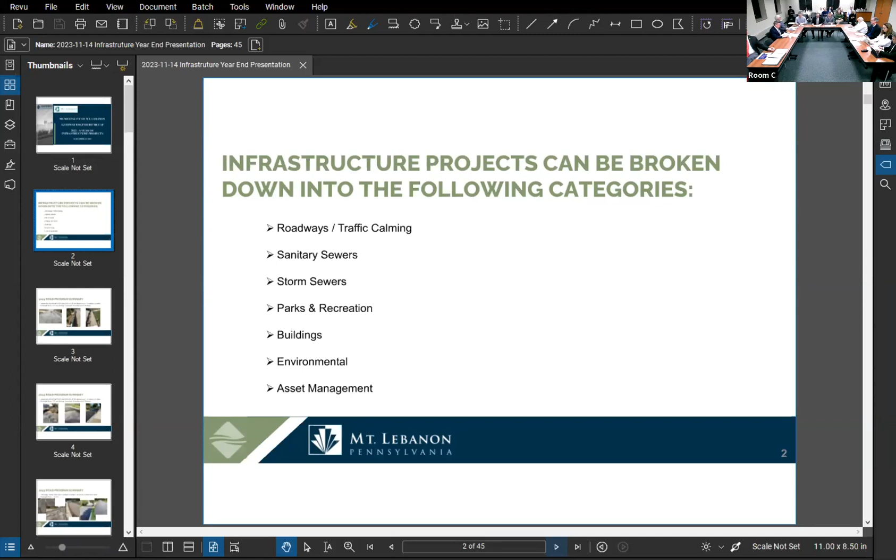So we've just broken it down into some different categories. Matt's going to take us through roads. Josh will talk about sanitary and storm sewers. I'm going to pitch in on some of the parks and building projects, and then we have a couple of environmental projects we'd like to highlight and then talk about asset management. So with that, Matt, you want to start us off on the roads?

All right, thank you, Dan, and good evening, Commission. Obviously, one of the bigger expenditures each year is the roads, both the reconstruction and the mill and overlay program. So we thought it'd be good to highlight some of the work done this past year. This year's road program encompassed 10 roadways. We did drainage work on 9 of them. It was just over $2 million for those roadways. If you equate that to a per-mile cost, since we did just over three-quarters of a mile, the per-mile cost is about 2.6 million per mile.

I'll contrast that with some of the mill and overlay work in just a minute. As you can see from the photos on the slide, the bottom left is a road that's going to be considered for reconstruction. The middle shows the different stages, because oftentimes in your package you see phase 1, phase 2, phase 3 of construction on the schedule as work takes place. The first picture is a road being considered, the middle picture shows drainage improvements being made, and that's a picture of roof drains being captured to eliminate icing issues that might develop.

The third photo on the bottom right shows new curbs being installed. On the next slide, the left image is the excavation where we're digging down to the subgrade soil. The middle picture shows the geotextile and stone going in, and lastly on the bottom right is the final pavement.

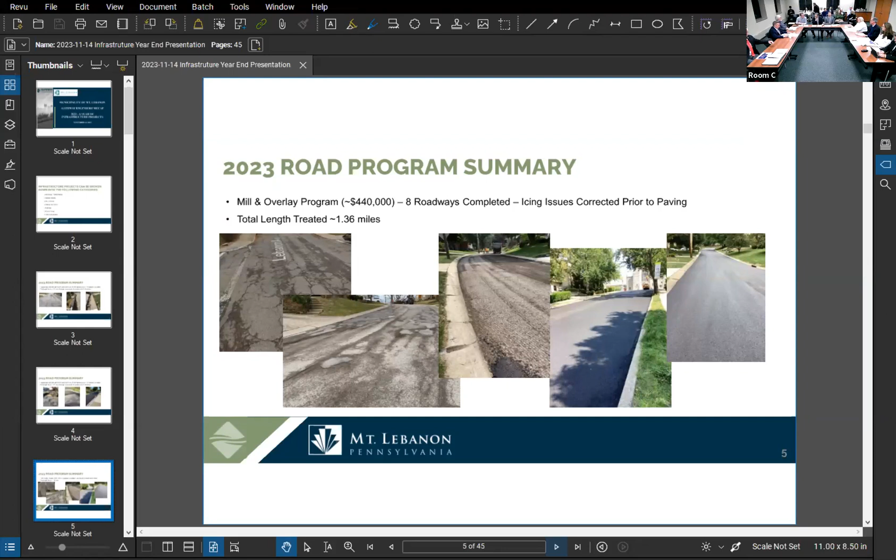So to that point, we know we're good for at least 50 years. Our thought is that as long as we keep milling and overlaying and doing that maintenance, we should be good on those roadways for 50 years, or more.

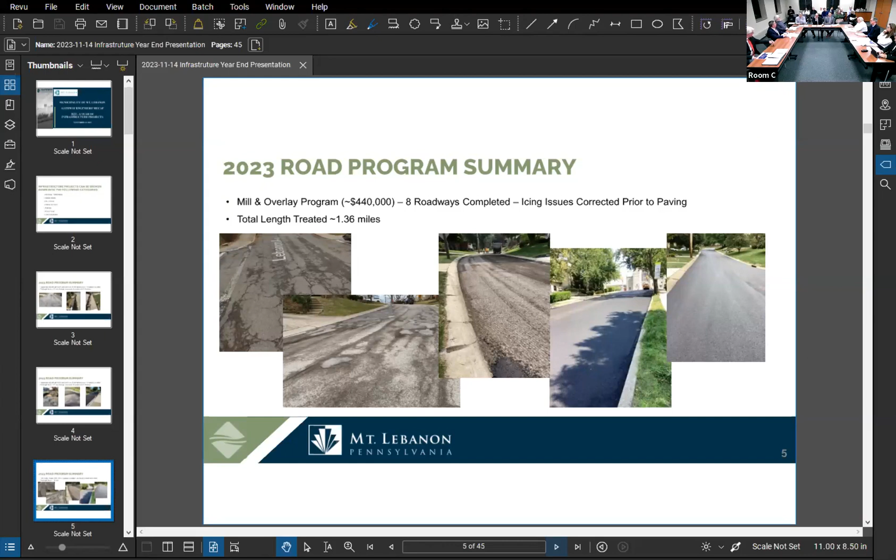Slight tangent on that topic: as the utility comes in and tears it up, does that change the long-term viability? Would that change your assessment? No, because that leads into the next slide here. So on the utility work, bear with me one second, I'll answer your question.

We did have a bit of a benefit in the past year, and over the last 6 years or so, the utility companies have been doing a lot of work, as we're all aware. Last year it was about 2.7 miles of road work. That didn't cost us anything other than the inconvenience of them working in and around town with the roads being torn up, but they did mill and pave the roads afterwards.

Now, what we always do, Public Works and I, if a road is a full depth road, they're required to put that full section back in when they finish their work. If it's a road that is asphalt over concrete or something like that, they just do the wearing surface material afterwards. They don't reconstruct it because they don't need to go into the base, especially if it's a road we're considering paving in the future.

In a minute, we'll talk about the planning for how we try to work with the utility companies for the roads they're going to do. We mirror that with our programs moving forward, because we don't want a situation where we pave or reconstruct a road and they come in the next year and dig it up. Obviously, we can't control their schedules.

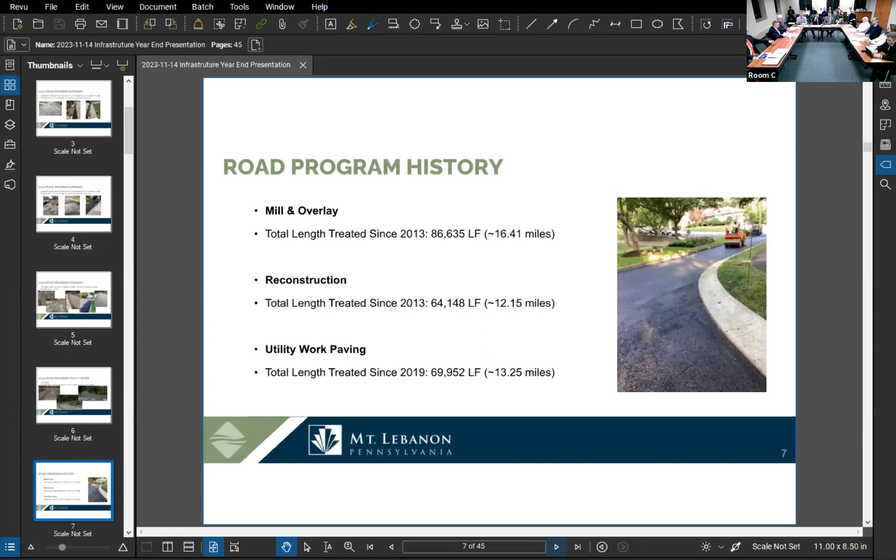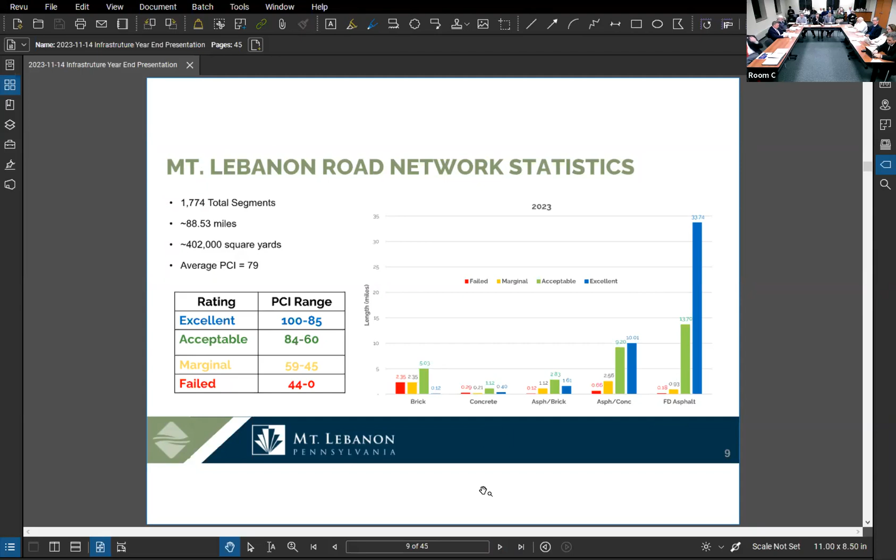The next couple slides are giving some of the statistics. You'll see the different roadway types and the breakdown between excellent, acceptable, marginal, and failed in each of those roadway types, from brick all the way to full depth asphalt. The next slide shows the miles of road in each category. For instance, the full depth is 48.56 miles. That's the number inside of the table there. And the top number, the 84.55, would be the average PCI of those full depth streets. It ranges from 84 down to 58, which is the brick streets, and that's the 9.85 miles of brick street that we've discussed.

I think it's really interesting to see that over half of the street system is full depth reconstructed. That was started 43 years ago. Think about that. In that time, we've gotten more than half of the roads rebuilt in the community. I think that's a testament to the commission always funding the program, because we're going to flip the switch pretty soon where we do more mill and overlay, as Matt was talking about, and we won't be reconstructing things at a certain point. So that's the idea of keeping your roads in good shape: rebuild the ones that are bad. A lot of the older roads didn't have any substantial base, no drainage, and all the things we've been doing in the current plan.

What does our ordinance say we want our average PCI to go no lower than? The current ordinance, I believe, is 60. 60? Okay, so right now our brick streets are averaging below 60, but the total overall PCI is not. On the whole, the total system is about 79. Yeah, correct. 79, that makes sense. But that is noteworthy to me that on average, our brick streets fail what our ordinance says when we pull them out. So I would say that's where we need to put the most attention, the most funding over the next 5 to 10 years. That's what's failing.

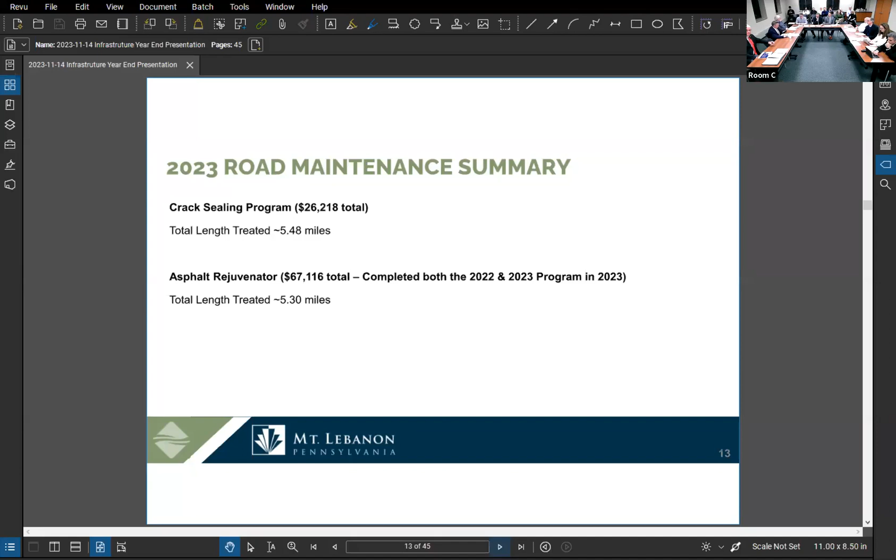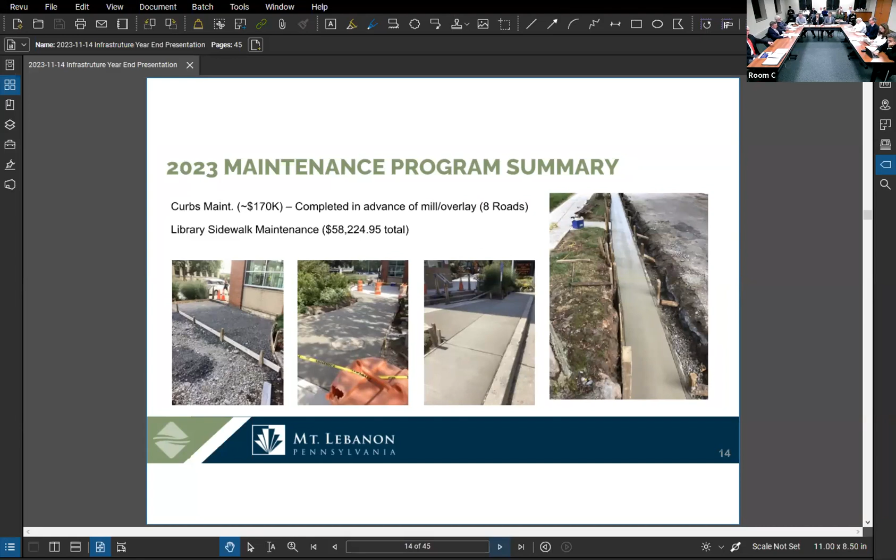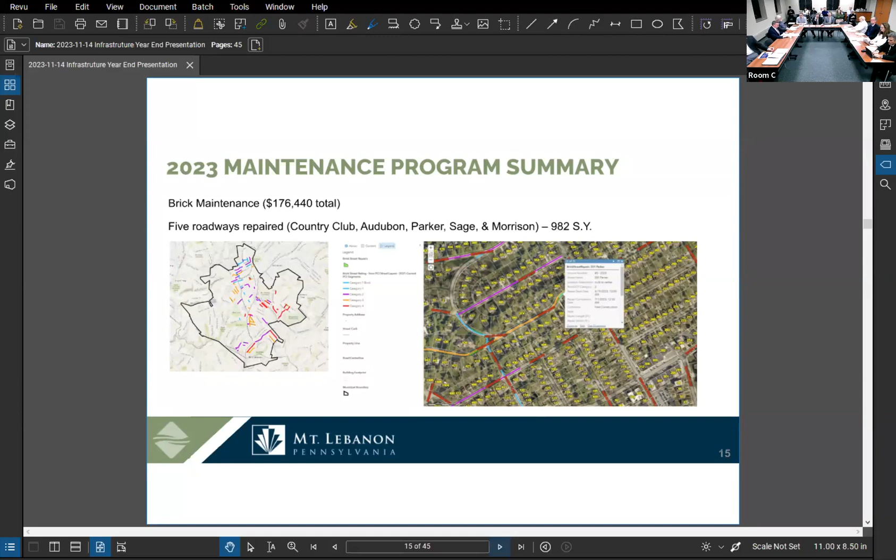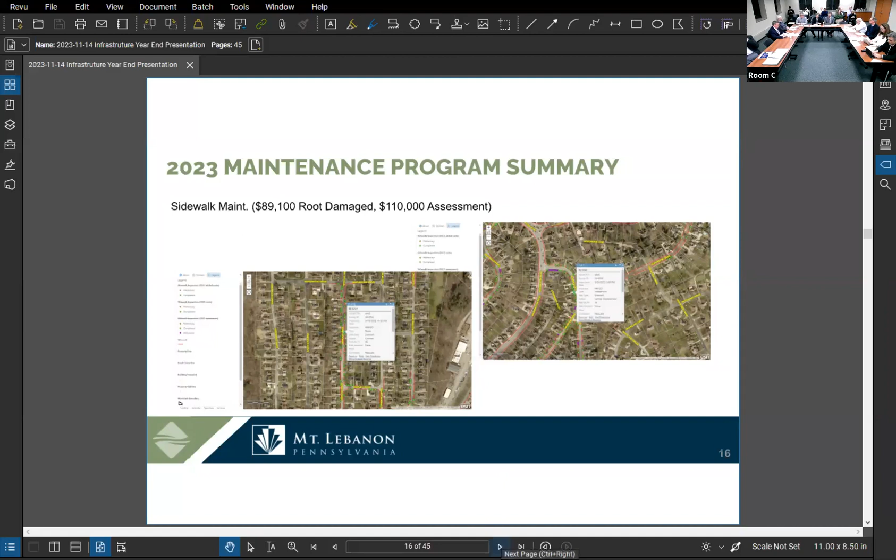Similarly, the sidewalk maintenance contracts, there's the root damage and the assessment. These, as was the brick street work, are run by Public Works. Other than us putting the contracts out, they keep track of it in GIS, which once again just shows how powerful a tool the GIS system is to keep track of all of these different contracts and what's done and when it was done and all those things.

Next, moving on to the component of traffic improvements and road improvements, there were a couple projects that were completed this year. Bower Hill Road and Segar improvements: we got a right turn lane, some ADA improvements, some signal modifications. This was partially funded by an ARLE grant, which is the PennDOT, or state of Pennsylvania, funding for automated red light money collected through tickets. And we were able to get this project done.

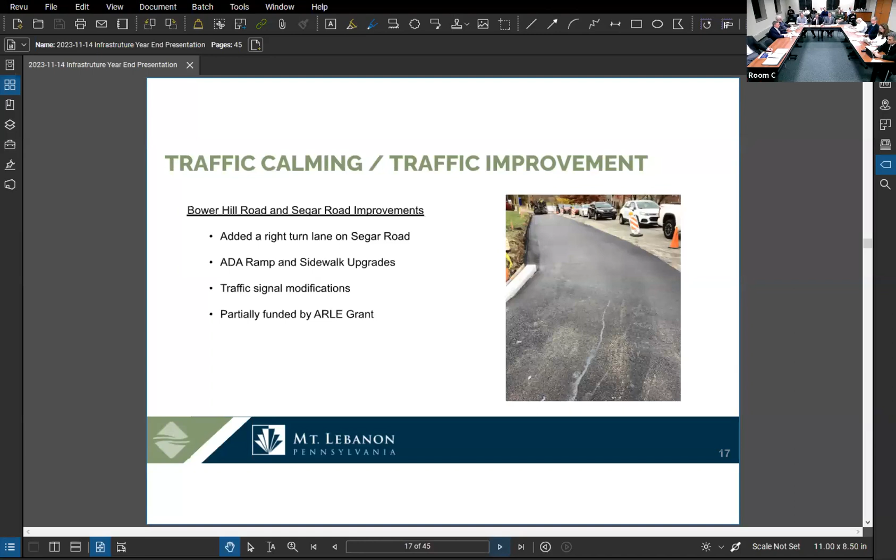It is complete. The second project that went through a long process and was ultimately built was the Arden Road traffic calming plan. There were geometric modifications made, some speed humps, pedestrian islands, a traffic circle. That project was originally bid. It really was authorized a little later in the year. When we put it out for bid, it just had too many different things going on to get people to bid it at that time of year. We were able to get the street reconstruction contractor to do a majority of the items that were already in his bid, and that project is complete.

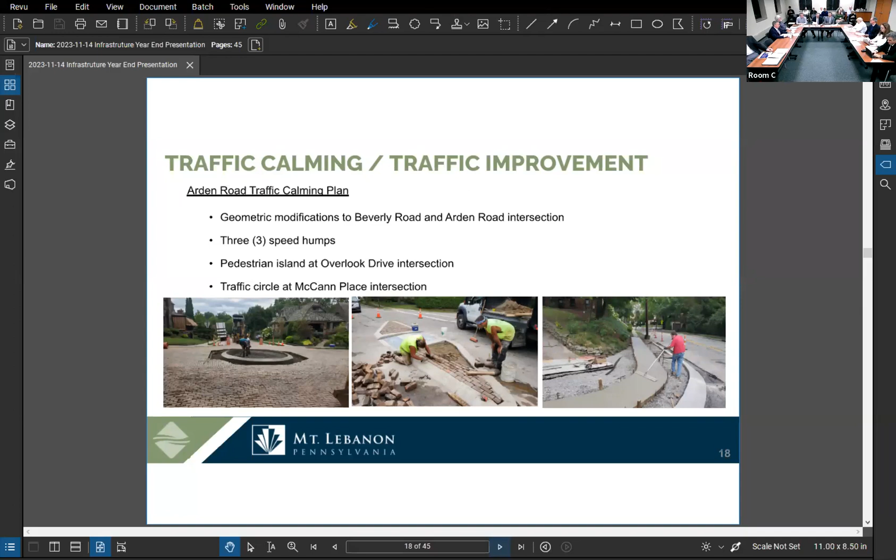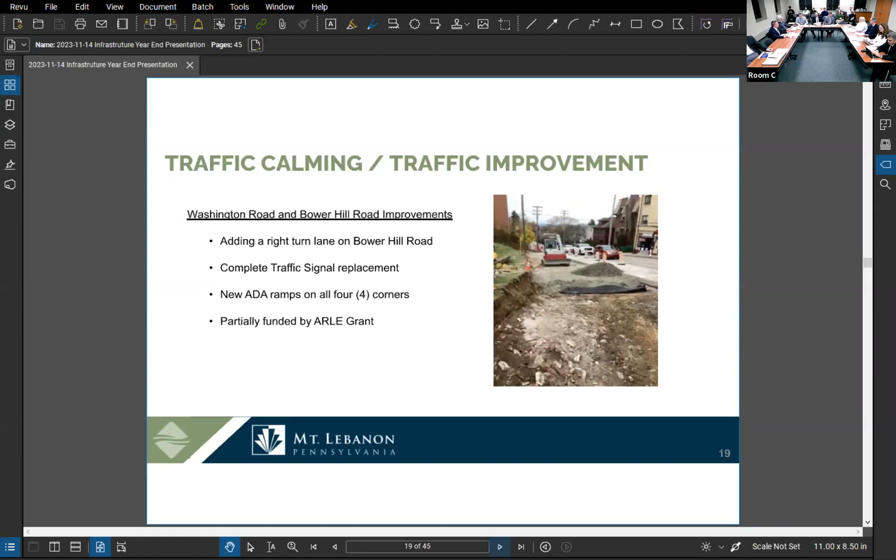The next project is the Washington Road and Bower Hill improvements. I call this another COVID project where it was started right at the point where COVID was, and due to some delays on materials and signals and poles and all those things, it's still out there. We're almost complete. This is an addition of a right turn lane on Bower Hill Road, complete traffic signal replacement, ADA ramps on all four corners, and again, this was partially funded by ARLE grant. So next, I'm going to turn it over to Josh for discussion on sewers.

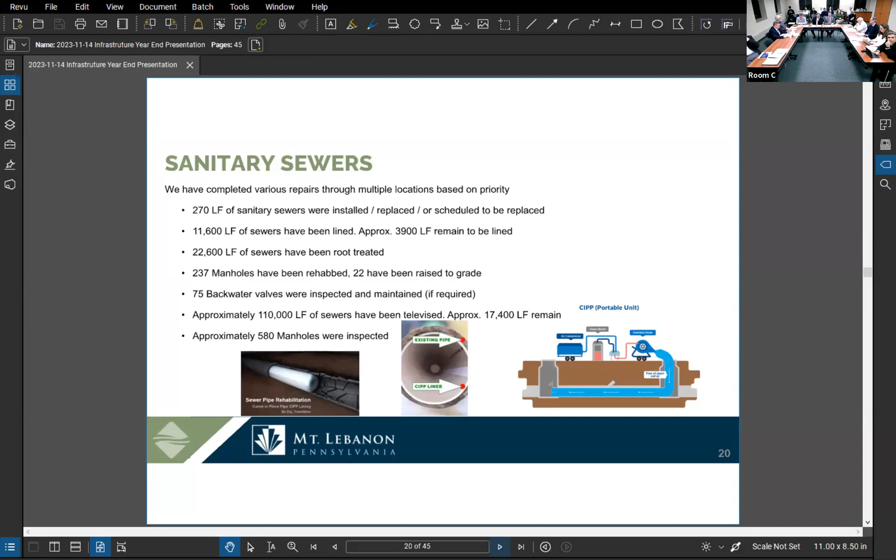So on the sanitary sewer side of things, I listed out on this slide various statistics of work that has been completed this year. But a high level overview of the program: we take a proactive approach, and each year we televise approximately 10% of the system. We couple that televising with the upcoming road program as well, so that if we do find any repairs we have to take care of, we're able to do that ahead of any type of paving that happens. So as we televise that system, we identify defects, which leads into the next slide.

A couple of these pictures show different examples of the various contracts we use to repair defects that are identified. Those contracts include the point repairs, which are your excavation repairs; lining, where we're essentially establishing a new pipe in an existing pipe without having to dig. It's obviously the least invasive and renews the pipe. Manhole rehab, where you're sealing the inside of a manhole. That's actually the second picture from the left.

Root treatment, which is a chemical treatment we push through the sewers to reduce the amount of root growth in that sewer. And backwater valve maintenance, which is a courtesy the municipality provides to the residents to inspect backwater valves. The purpose they serve is, in the event the flow surcharges in the main line, it prevents the flow from going into the house. Got it. Exactly. Many of these contracts are multi-year contracts. The benefit to that is it reduces bidding costs and helps to establish contractor consistency.

One thing interesting to note is, 10% of the system is 15 miles. So every year we have to digest 15 miles of TV tapes, look at those tapes, and assure that where there's defects they get addressed. There's a lot of coordination between getting repairs done, documenting them, reporting back to the agencies, because ultimately the health department monitors the maintenance program that's done on our sewer system each year.

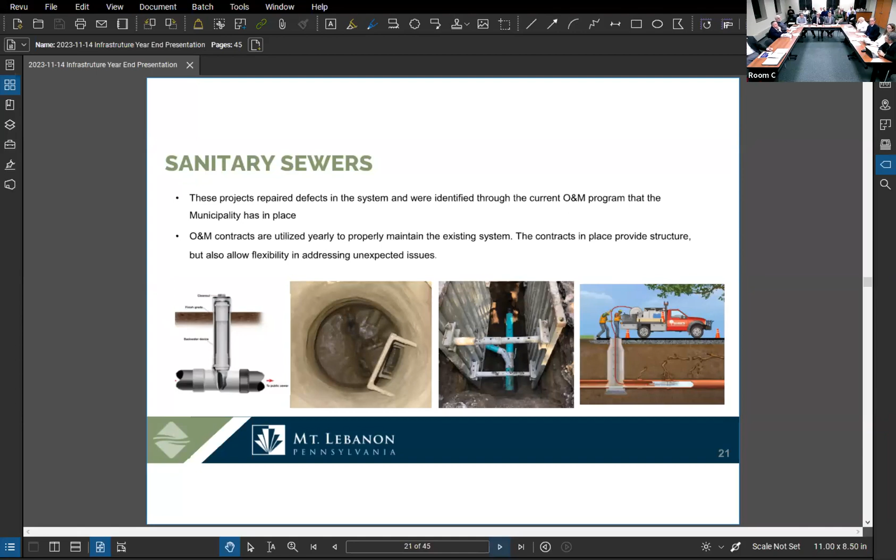And have we learned anything from the flow meters that were installed? I know one of the questions we got from residents when we started discussing, even before the results of the consent order came in, we were talking about I&I and trying to measure that. Have we gotten any usable data from the flow meters we've installed?

Sure. So what we did, there's multiple types of meters. The commission actually allowed us to use something to do nighttime flow isolation, where instead of going out and physically opening manholes and taking weir measurements, we installed trackers that actually collected data that we used. That's used to actually pinpoint that 80% of your problem is in 20% of your system. So it has allowed us to sort of hone in on those particular areas to do projects.

And that's what we have on the bid right now. We're using that data, that's what you authorized us a couple meetings ago to actually go out. We're taking bids in December to do a very large lining project that is a result of that data we've received. So the actual test will be the post-construction. The data is used to zero you in, you do the project, and then the consent order requires you to do post-construction flow monitoring to determine the results and how effective it was.

Do we have a sense of the split between municipal or public and private, in terms of that 80% of the problem being in 20% of the line? Is that just considering the public lines, or is part of that 80% private lines as well? Yeah, it's considering it sort of zeroes you in first on your main lines, but once you're done, then you'll have accurate information to know on the next step. If all your lines are done, then you zero in on your lateral type of issues.

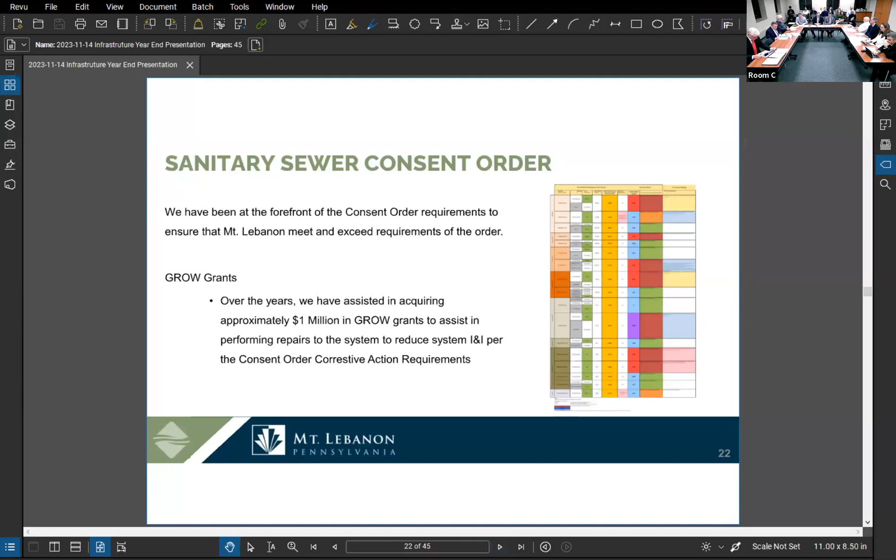We'll continue to work with other municipalities. One thing to note about Mount Lebanon is we have 17 separate POCs, second only to the city of Pittsburgh. That means we have 17 places where we connect into other municipalities, or points of connection.

A POC is a connection point. We have to coordinate with 8 other municipalities, which requires coordination going into the future, probably doing joint projects together that make the most sense for both municipalities. We may not be doing work geographically in our community, but we're ultimately helping deal with the problem. So that's all I have on the consent order.

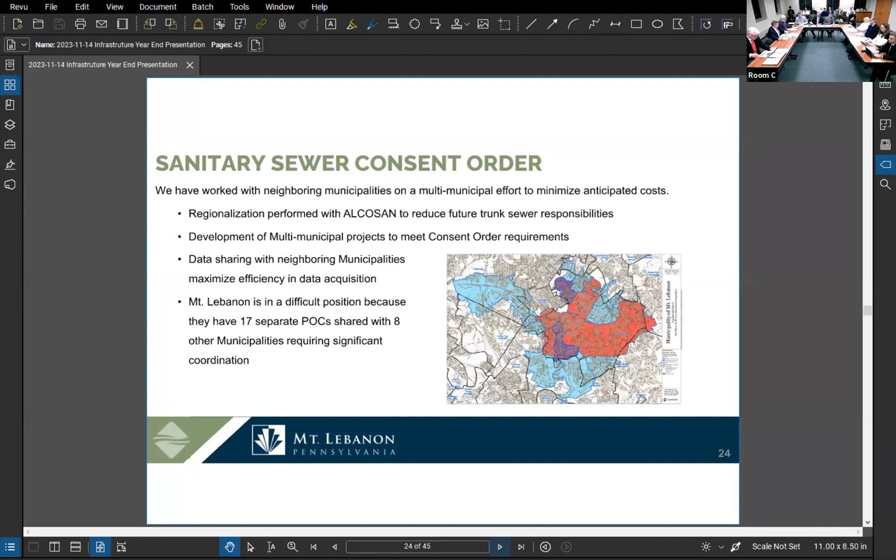Josh is going to talk a little bit about the storm sewer. On the storm sewer side of things, we follow a very similar program to what we do on the sanitary sewers.

The televising we do is typically ahead of the road program, and as a result of events, after storm events, we hone in on a project to resolve issues. The types of projects we're doing each year are repairs to ice spots, whether that be ahead of a road program or just an ice spot that needs to be repaired—that's a continuous maintenance issue.

Resolving defective pipe could mean replacement of that pipe or lining, helping with flooding issues and pole replacements.

The pictures I show demonstrate a few different solutions, whether it's putting new pipe in and replacing the old pipe, cured-in-place lining—similar to the sanitary sewer lining—or slip lining, where you're pushing a new pipe through an existing pipe. That doesn't work for every situation; it's dependent on existing conditions, but it's less invasive than digging.

We continue to be surprised. The storm sewer system is roughly 75 miles of pipe compared to 150 miles of sanitary sewers, but we continue to be surprised each year by things that we find. That's why the commission's commitment to keeping the storm sewer fund in place going forward will continue to be very useful to help people.

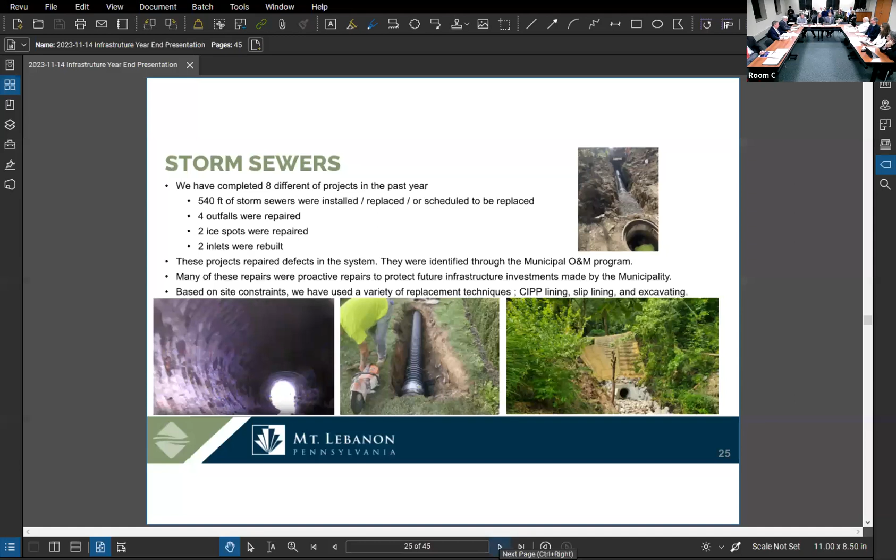Now we're going to move on to projects that we did in the parks. Josh is first up with Robertson Park. We originally went out to bid earlier this year on this project. The budget was around $72,500. We reached out to numerous contractors, approximately 15.

When it came time to open bids, the single bid we received was upwards of almost 3 times the cost if you added in the alternate. So we went back to the drawing board and coordinated with Public Works on the project. Essentially, we ended up building 2 different contracts, one for the topsoil and one for the fencing. Part of the problem was that it wasn't big enough of a project for contractors to chase, but it wasn't small enough for your everyday landscape contractors to take care of. It was kind of in the middle, so we broke it up accordingly and were able to almost act as a GC to coordinate separate scopes of work.

At the end of the day, we were able to bring that in approximately $10,000 under budget, so it was a successful project. But there was probably extra engineering management on top of that—extra administrative costs and inspection costs, just helping coordinate schedules, like doing this first then that—but still not 3 times the cost.

Much cheaper—thanks. I think part of the lessons learned in the post-COVID world with contractors is that people have their specialties and want to stick with them. If you ask them to do other people's work or coordinate other work, they don't want to do it. They're that busy, they have enough work. They don't want the extra hassle of managing other people and carrying their costs, so we're only paying a 10% increase.

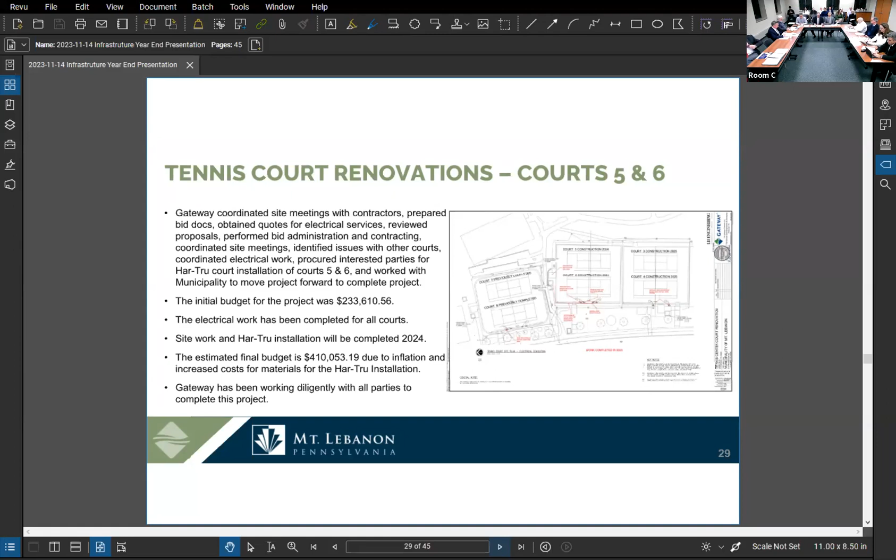Fortunately, on the state contract, the COSTARS, they have bid the Har-Tru work. We were able to get an estimated budget for that. It's not in line with what - the costs have gone up significantly - but again, we have a plan to go forward. We know that we're on the list to get the work done, and that's most important in terms of these type of projects.

Next project is the pickleball court. Fortunately, pickleball was so popular that there were contractors very interested in this. They were willing to coordinate things because they deal with the nets and different things, line striping and everything related to it. So we were able to bid this project, get it in under the budget with minimal delays, and it was completed.

I threw a slide in here on Vibrant Uptown, just to really highlight the significance of the infrastructure related to this project. I know it was not necessarily a fun project for anybody, but I did want to highlight the fact that it still came in under budget. We had great construction drawings, and we had no change orders required due to document issues - they were only things that we added to the project as necessary.

We got through it, and at the end of the day, you look at the numbers in terms of the next slide with the amount of work that was done. I'm not going to read through the numbers, but there was a lot of work done. We're almost there with getting the railing up and some punch list items, and we'll be done with this project.

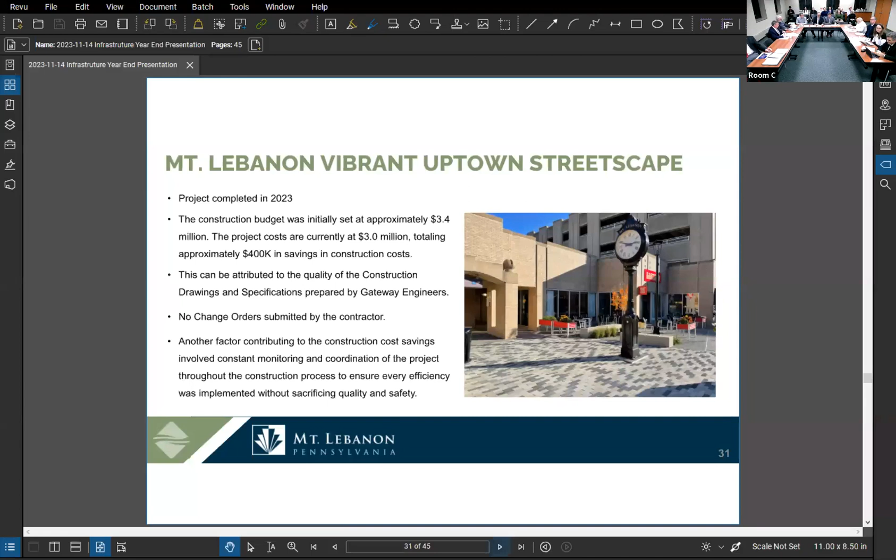The next project that we do annually is the community block grant sidewalk work. This is one of the few projects that the municipality qualifies for grant funding. Each year we coordinate with Public Works to select the locations of where we're going to do these ramps. We try to stay ahead of the road program mainly, and we get these ramps done, then the road program comes in and the ramps are complete, which ultimately allows you to do more road work instead of having the ramps as part of that.

Moving on to some of the building projects quickly here. Are those putting in ramps where there currently are no ramps? Correct, that is.

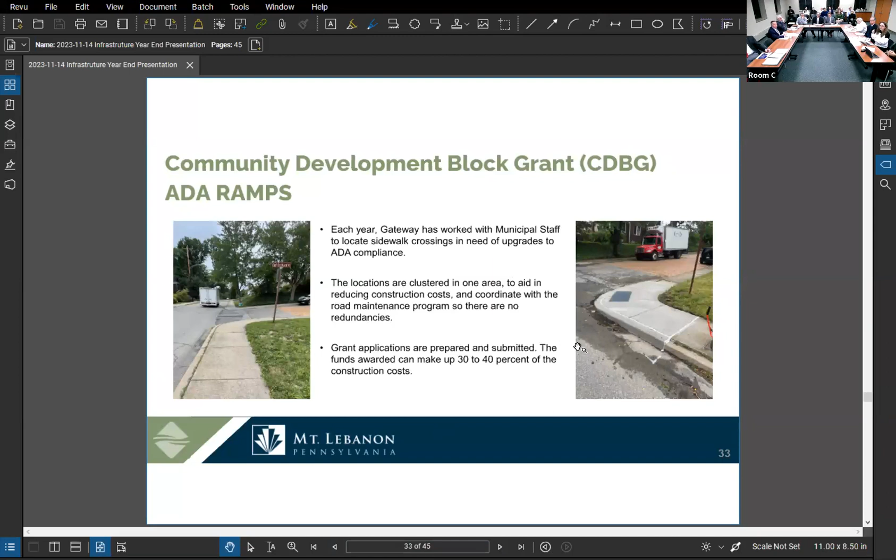Are we putting them in at the angle? It looks like from that photo, and I thought the ADA recommendation was to put 2 ramps in so that no one's entering the intersection directly at that angle, instead of crossing at the crosswalks.

I think a lot of corners follow one ramp, that's an acceptable practice for the crossing. It was definitely recommended during Vibrant Uptown, but that's not the real issue, best practice.

Making sure that the curb and the road come in like this, so you don't have a dip where water and snow collect, that really makes sure the water gets around. That's the real thing.

The biggest problem really, PennDOT has different standards for state roads, and that's what happened in Vibrant Uptown. Plus you're crossing 2 lanes of traffic and dealing with signals. The signals have to be aligned with the crosswalks.

You have a little more, mostly on ADA ramps it's slopes and drainage issues. And the tactile strips that we have to have there.

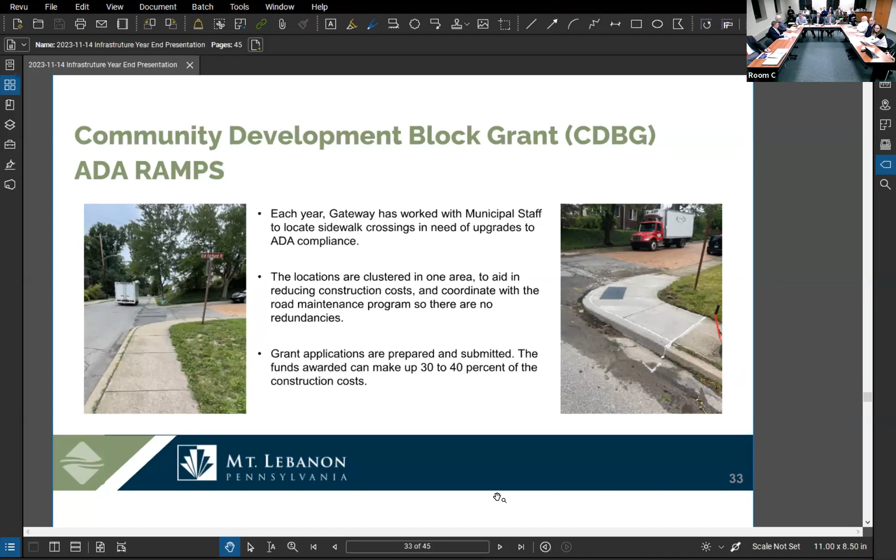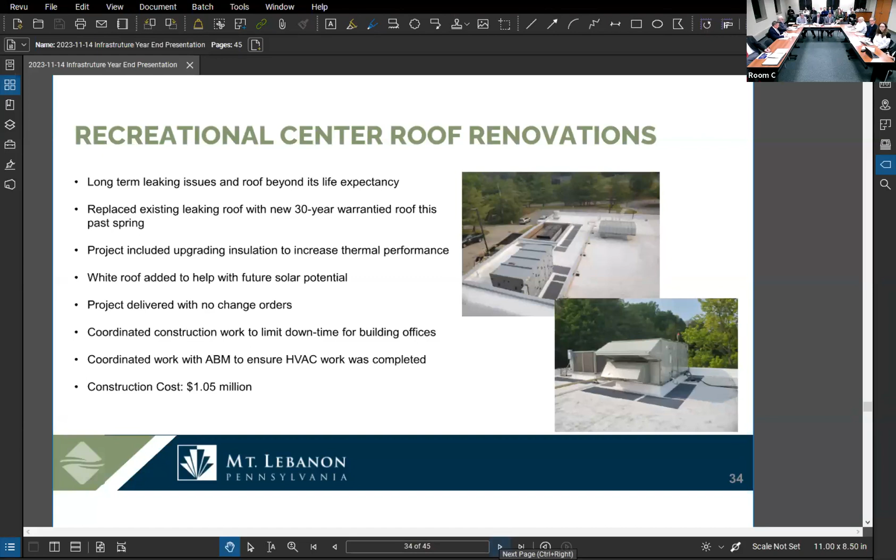That one's totally done, is it? Yeah. That's great.

The project that we worked on in-house with Rudy's department, Phil Rolio specifically, we did the women's locker room expansion. We were able to get some contracts out, work with some subs, and basically get that project done.

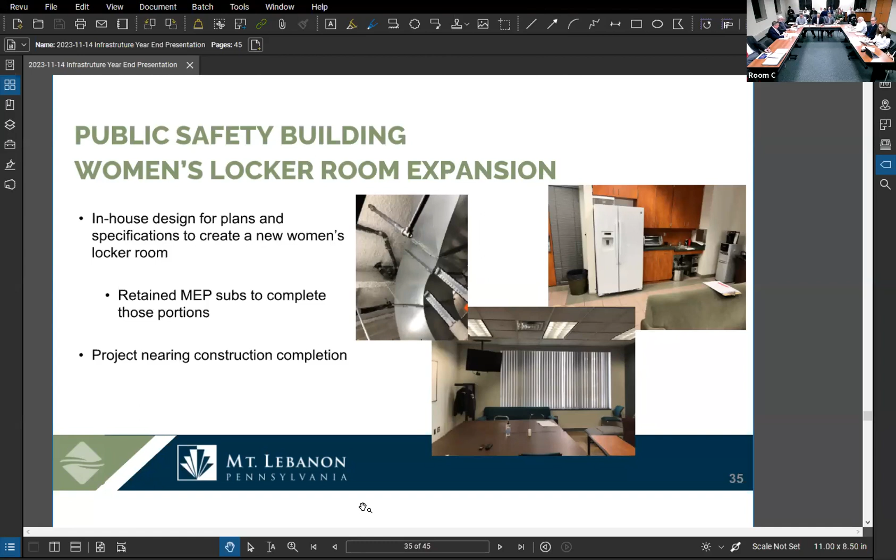It's very near completion. On the municipal garages, there's a couple projects always going on. On the maintenance side, we did some maintenance work on the north garage and coordinated the RFP on the south garage. We're developing the plan now to implement the improvements or maintenance to the south garage to keep its useful life until such time as that structure may be replaced.

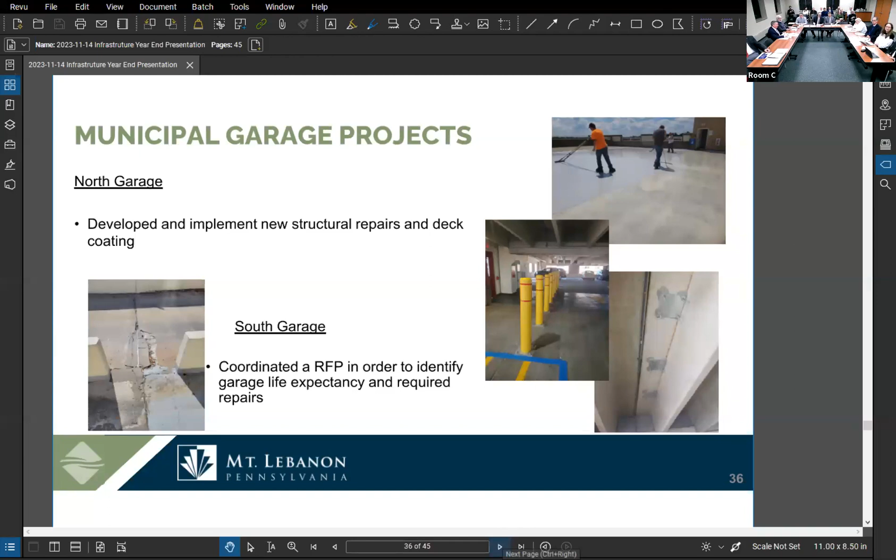Looks like they're playing deck hockey up there. Yeah, it's looking fun, they probably are. That'd be a good idea. We gotta close it off one day, have deck hockey.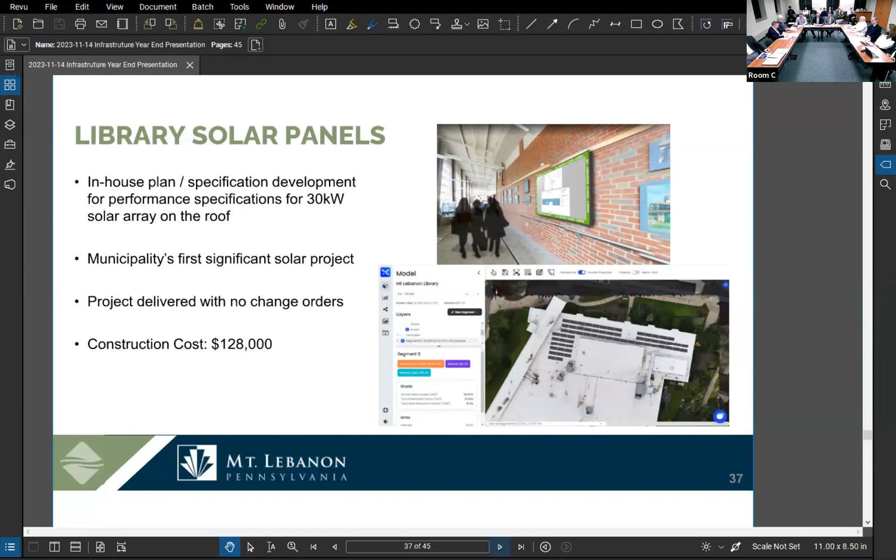Another building project was the library solar project. It was the municipality's first significant solar project. This went on without any changes, if we could get the monitor to work up there, which they continue to work on. We haven't finally paid this contractor off till that's fixed, but that's where we are.

Awesome. Moving on to the Thornwood Stream Restoration Projects, which is an environmental one. I'll let Matt talk about that.

In the interest of time, just on the Thornwood Stream Restoration, that was one that was completed earlier this year. It was a very flashy, flash storm type stream with lots of erosion. Really the intent of any stream restoration is to take those erosive forces away from the banks and direct them more toward the center of the stream.

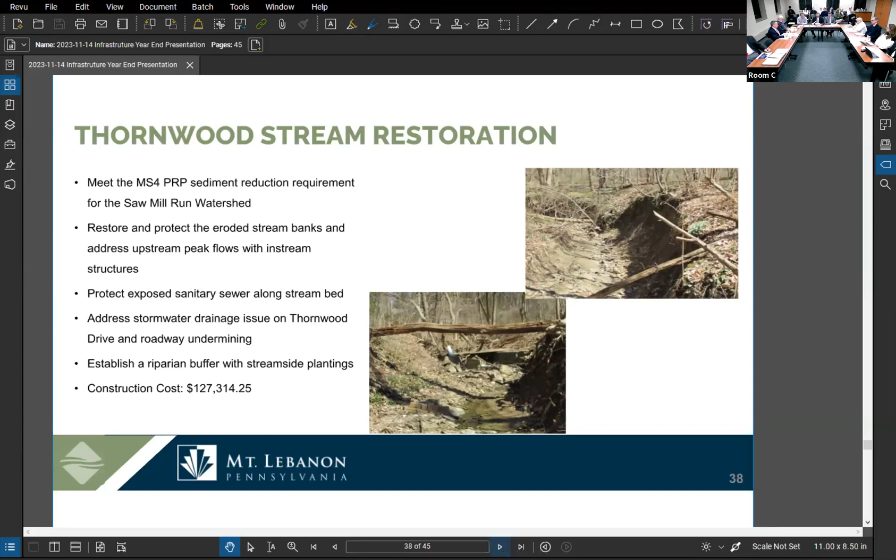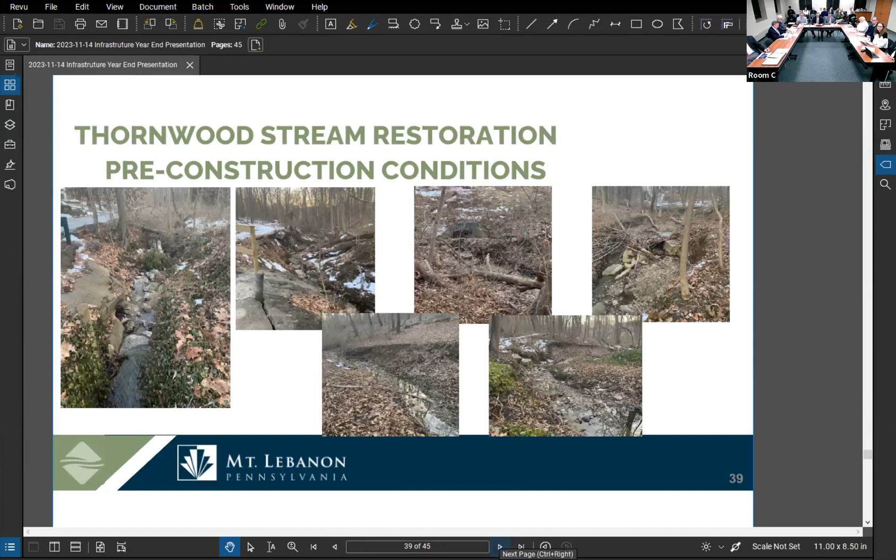As you can see by these first two slides, these are the existing conditions where there was erosion along the banks, and there was a sanitary sewer becoming exposed through the stream. In the next photo, what we implemented was rock cross vanes, log toe, branch layering, laying the slopes back, all with the intent of directing those erosive forces to the stream, so it's better protected for those flash storms moving forward.

Just briefly on that, has the planting been done yet? Yeah, the planting was done at the beginning of this year.

They planted a number of plants, though it will take a while to grow. There's planting along the stream called branch layering, back into the bank above the log toe. That will take root and grow along the stream to help stabilize those banks. There was also additional planting done outside the actual stream, in adjacent areas.

The Parks Board has done more research and has ideas about types of plantings that work well along streams. Some of the current research suggests larger shrubs are better able to withstand those conditions, but it really depends on light and many other factors. Rudy is aware of some of that information, but we could loop them in next time we do a stream project—they have good ideas.

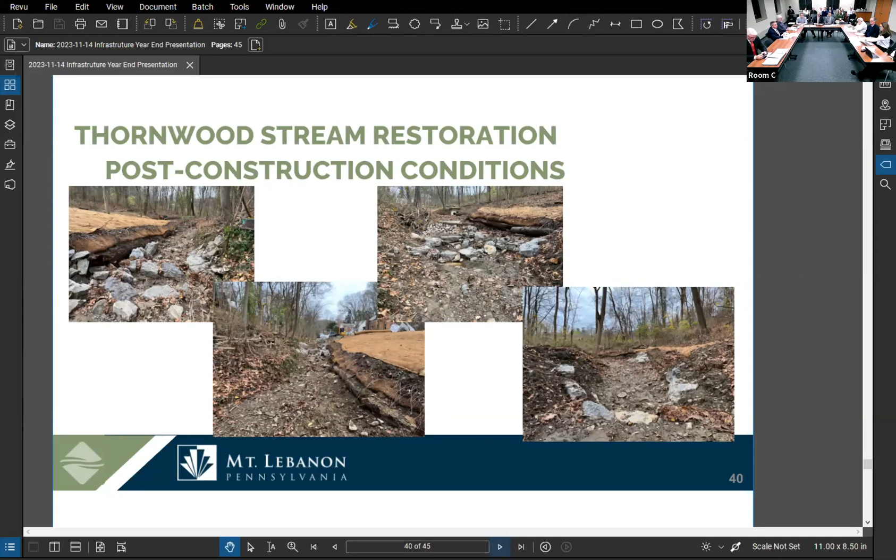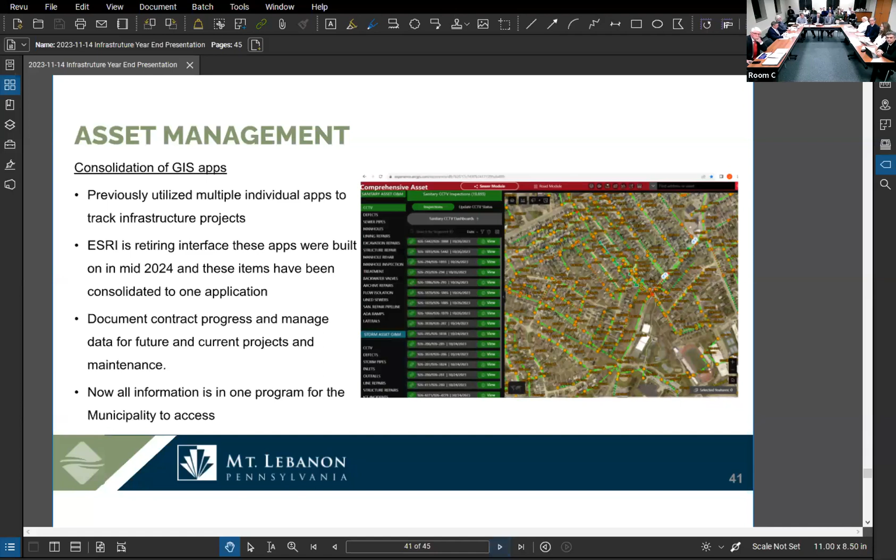Wrapping up asset management, we've made significant improvements to the GIS system this year, again working with Mount Lebanon's in-house GIS person in Public Works. All of this work is being documented and tracked, kept forever, so that when we're not here anymore, people will know what has been done in the community. You can see this year some of the information that was put into the system and is up in the cloud for us to find and use.

It's very useful—both Rudy and I can get on the phone with people. If a resident calls and something happens, we can immediately get information, quickly make answers, or determine what problems might have existed and deal with them. It's a great tool, and we continue to try to enhance it.

Is there anything we're not doing that we should be with the ESRI stuff? We've got access to this data—is there something we should look at? Like, say, 75 backwater valve inspections—do we plot that in GIS and see if there's a specific area where all our backwater valves are? Does that suggest a problem in that area, or do we generally already know where the problem is? That's the kind of stuff I'm asking—is there anything we can do with this data that we're not doing?

That's a great point. Some of the analytics we have now are mostly used for tracking and making sure we're making progress. But the analytics related to it, we could use for other things—we really haven't touched that end because we're always behind the eight ball, just trying to keep up with maintaining the infrastructure given its age and how much work has to be done in a given year. Record keeping is important to know when you need to come back to certain areas, but your point is well taken.

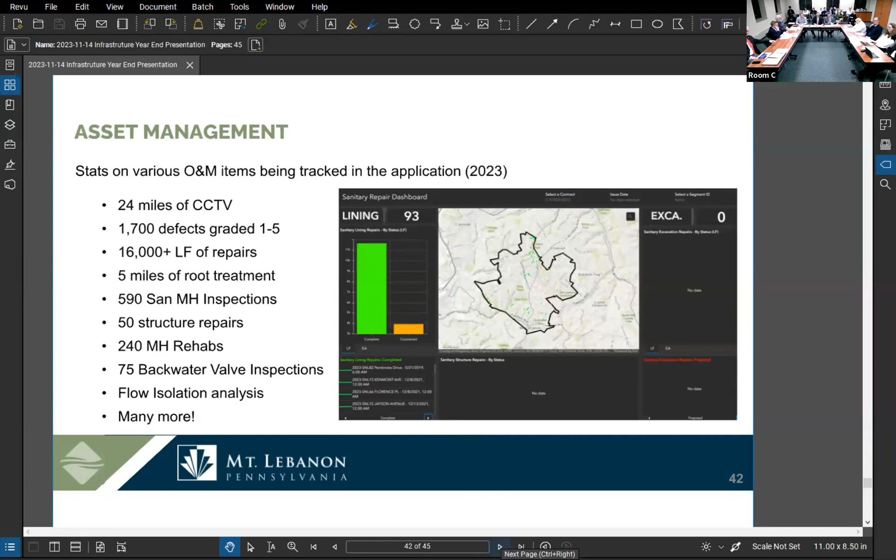It's an interesting dynamic. I know we're short on time here, but. Kind of an overtime, so. Are we? Okay. Exactly.

Well, I just wanted to, we do recurring projects, obviously, each year. This year's been a real big year related to residential projects, really assisting Rodney with a lot of stuff related to stormwater reviews, a number of walls that are going in. It's amazing what people can do on a small piece of property. And the concern is always how's it gonna affect your neighbor, that's my big concern all the time. So we do help Rodney with those things.

Yeah. And then just to wrap it up, for Matt and I, we've been here since 2000. We think that we've really developed a lot of good programs here with Rudy's help. We're really on a good path to completing projects. This has been a record year, obviously, in terms of amount of projects that have had to be done or were mandated to be done. We appreciate that. It takes a lot of people to get this all done.

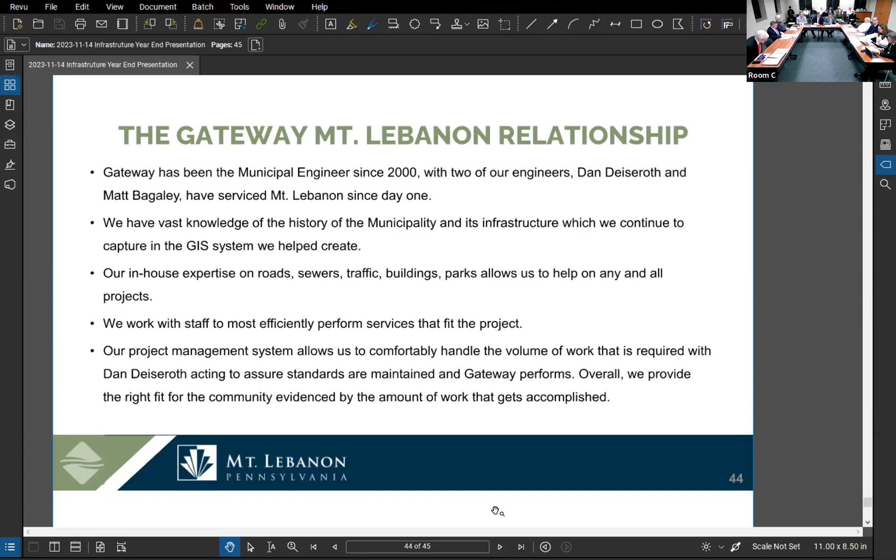What I generally look at is I'm the responsible person here. I have Matt on my right, Josh on my left, and then we bring Mike in on traffic, Ryan on asset management, and then Denny's on sewers, Kevin's on buildings. It takes a whole staff of people to do some of the projects that we do each year. And again, I think that we're a good fit for the community because we do have those services. When you need them, they're there. And we quickly and efficiently try to get projects done and get results, so.

Back to the resident side, I just really have appreciated over the years how fast Gateway is with responding to residents. Oftentimes, I won't even know that there was an issue with someone in my ward because you've just handled it and explained it to the residents or resolved the issue, and maybe I'll hear about it after the fact. Well, thank you. Weekends, whatever. I'm not asking you to do that, but you're doing that. We know that's our job, and of course, we live in the community and we care about the community too. So. Right, well, thank you for that presentation, we appreciate it.